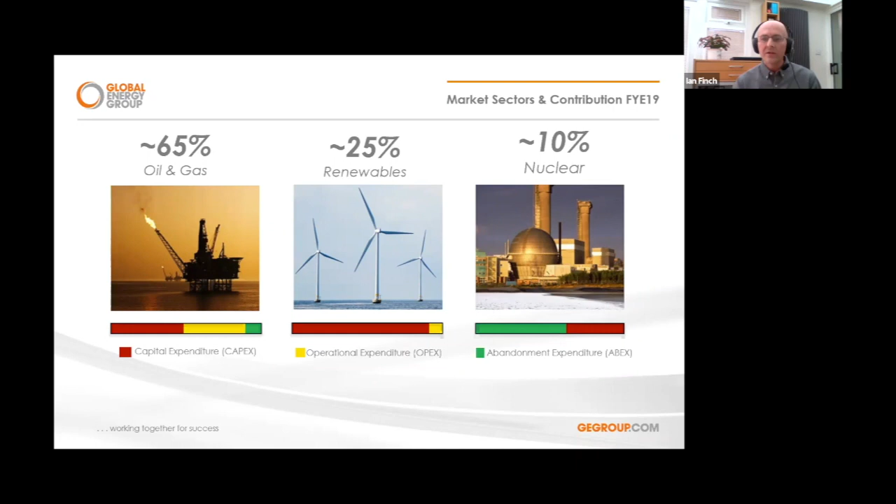Just in terms of some of the sectors that we currently work in oil and gas, we've been very heavily involved for many years doing fabrication of very large structures, but we also still have the capability to do smaller fabrication and maintenance and repair activities. So we've got a rig inspection, repair and maintenance business. Back in 2015, we did our last major project, which was an FPSO refurbishment for the oil and gas sector. And we've also got a marine logistics capability.

This is something that we developed as part of our offering to support the renewable energy business back a few years ago. And I'll talk a little bit more about the investments that we've had on the plant as we go through the presentation.

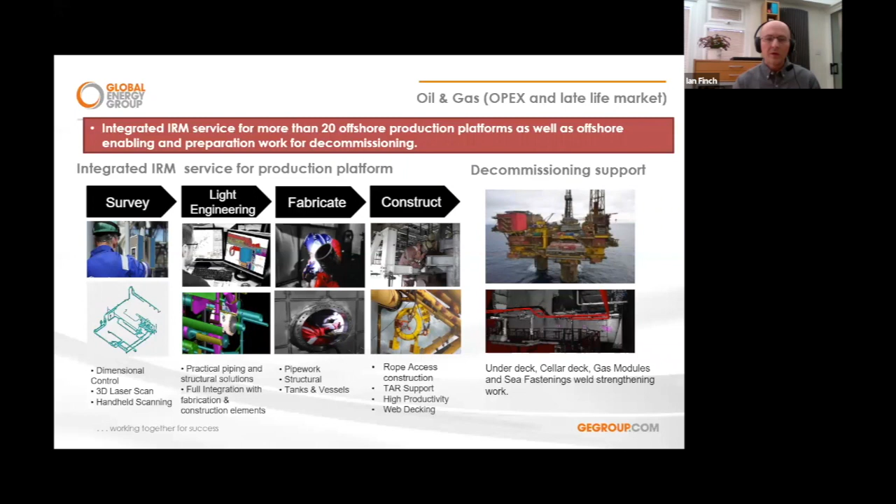So current activities in oil and gas include working on the operational activities of oil and gas projects. We do a lot of survey work, light engineering work, fabrication, construction of various components in the oil and gas industry. We've got rope access specialists and pipe work and structural engineers. So quite a wide varied capability within the group.

Last year, in 2019, Global Energy Group acquired a company called Apollo Offshore Engineering, who are based in Aberdeen. Now, Apollo's been around for a number of years now and has a very well-respected client base in the renewable energy and the oil and gas sector.

And so bringing together the skills and competences of Apollo, which provides the offshore design engineering capability, along with the construction and fabrication capabilities of Global Energy Group, gives the group as a whole the capability now to start looking at full engineer procurement and construction type projects. And if anybody's got any questions on Apollo, I'll happily answer those towards the end of the presentation.

So I just want to take a few minutes to give you a bit of background into how I got into renewables and why I'm so passionate about this sector. So my renewables journey really started when I was working in the industrial automation business for a company called Rockwell Automation. I was 12 years at Rockwell Automation until 2008.

During that time, one of the areas that we had a big focus on was actually energy efficiency. So in industry, we were promoting the use of variable frequency drives to try and drive down the cost of electricity usage in factories and so on.

In 2008, I started a new career in renewable energy working for NAREC, the National Renewable Energy Centre, as it was called at the time. A few years ago, NAREC, as most of you will know, merged with ORE Catapult. NAREC has blade testing and nacelle testing facilities for wind turbines. And that was a fantastic entrance into the renewable energy space.

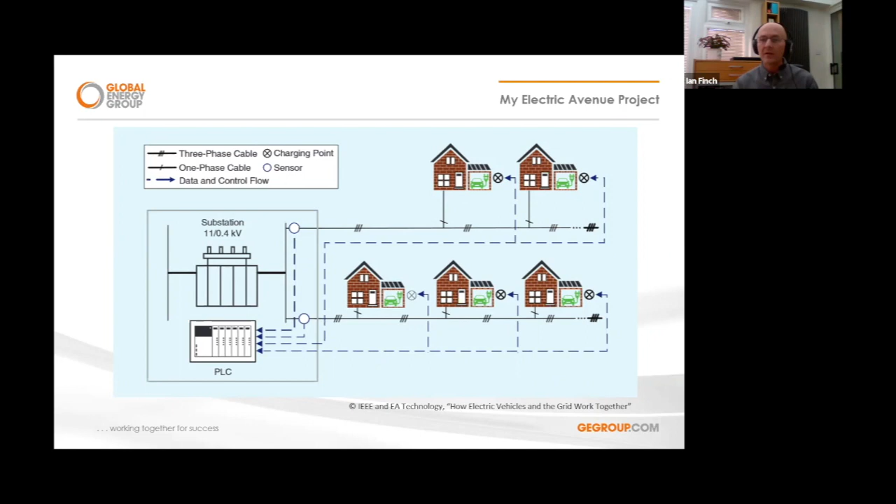Just to give you a little background as to why I believe renewables make sense, both at the commercial level, which we're going to go on to, but also from a domestic level as well, I wanted to show you these figures I took just yesterday.

My solar panels on my roof have actually generated over the course of this year 3 megawatt hours of electricity. Now, if you contrast that with a modern day wind turbine, if you look at something like an MHI Vestas 9.5 megawatt turbine, one single turbine would produce the entire energy production of my solar panels in the space of just 20 minutes today. But nonetheless, it's still a fantastic contribution to the grid.

And for me personally, if you look at just the performance figures for March, 285 kilowatt hours of energy generated in March. Our electric vehicle used 160.5 kilowatt hours of electricity during that whole period. So you could almost say that the electric vehicle has been charged entirely for free using sunlight.

And of course, electric vehicles are something that I'm quite passionate about. They're incredibly cost energy efficient. The cost per mile is approximately 3.5 pence per mile.

And if you compare that with a diesel vehicle, if you took an average diesel vehicle with 45 miles per gallon, and the current diesel price of £1.33 a litre, you'd be looking at about 14.7 pence per mile. So an electric vehicle is actually about 4 times more efficient.

And this, of course, is one of the reasons why the energy industry is seeing this energy transition. People are moving away from fossil fuel transport, and they're moving into a much more energy efficient world.

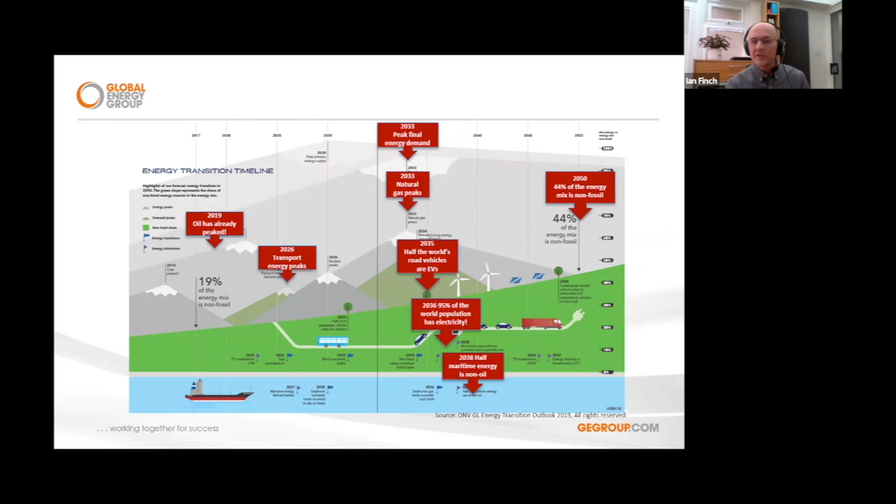By 2038, half of the maritime energy is going to become non-oil. And by 2050, 44% of the total energy demand will be non-fossil.

If you look at the compound annual growth rate for onshore and offshore wind over the last 20 years or so, the average is about 21%, and during the last 10 years it's been averaging about 12% compound annual growth. Moving to more specific figures, 651 gigawatts globally, of which 29 gigawatts is currently offshore wind.

But the offshore wind market is growing even more rapidly. During the last 5 years, the offshore share of new wind installations globally has grown from 5% to 10%. And in fact, by 2024, that share should have risen to 20% of global wind installations.

So certainly offshore wind is going to be here to stay, and we're going to be moving away from fixed bottom technology to floating technology as well. I'll talk a little bit about some of that technology in a moment.

We've got, in the UK, a 40 gigawatt target now of offshore wind by 2030. And the ScotWind leasing round in Scotland alone, which will be of interest to companies operating in and around Aberdeen, is looking at a potential target of 10 gigawatts by 2030. Bearing in mind we've got about 1 gigawatt installed in Scotland today, that's a huge 10-fold increase in potential capacity in a very short period of time. So it's exciting times for the sector.

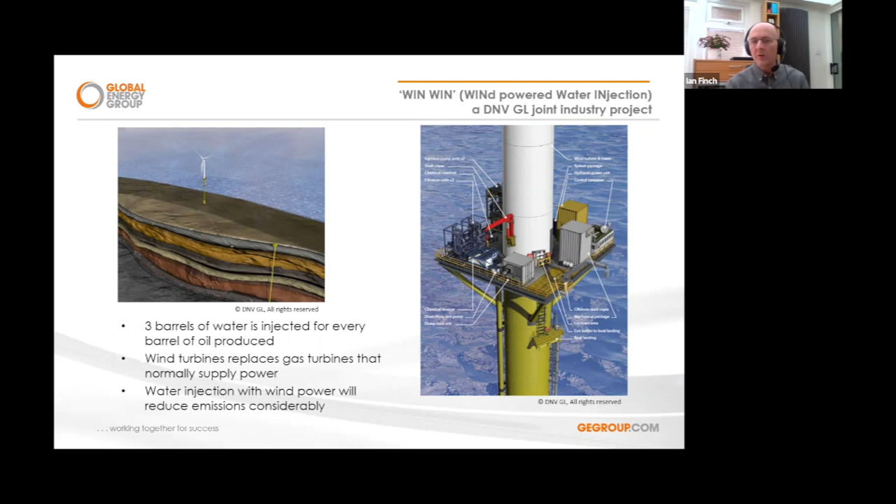Another area is obviously offshore wind to hydrogen. With floating wind turbines or even fixed bottom wind turbines in the right locations, you could have an offshore green energy production facility, essentially making pure hydrogen and oxygen from desalinated seawater. And that produces an extremely efficient method of getting the hydrogen.

One of the problems with electricity is that you can't predict when the wind is going to blow, although it does blow typically offshore most of the time, and most offshore wind turbines now are getting capacity factors between 50 and 60%. You can't guarantee that all the time, so hydrogen provides a method of storing that energy in a convenient way.

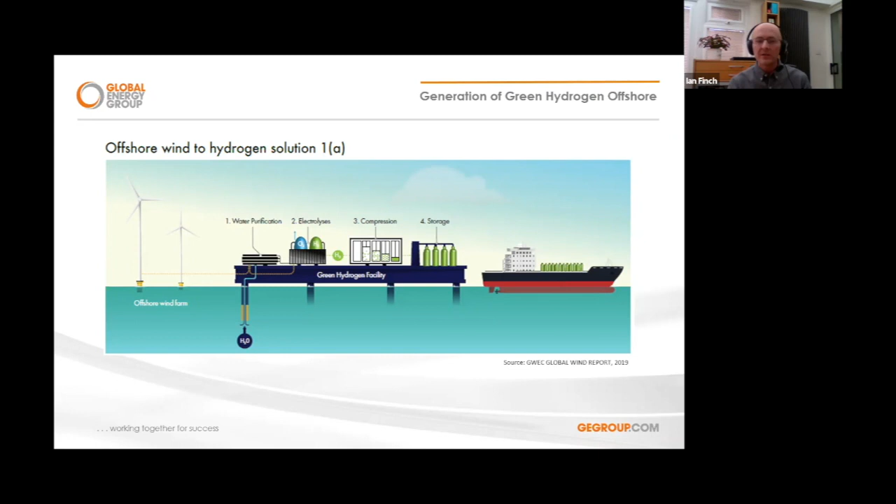These slides are courtesy of the Global Wind Energy Council. This first scenario looks at a water purification plant, an electrolyzer, compression of that hydrogen and storage, and then a tanker or vessel can take that produced hydrogen away. Of course, vessels can be quite expensive.

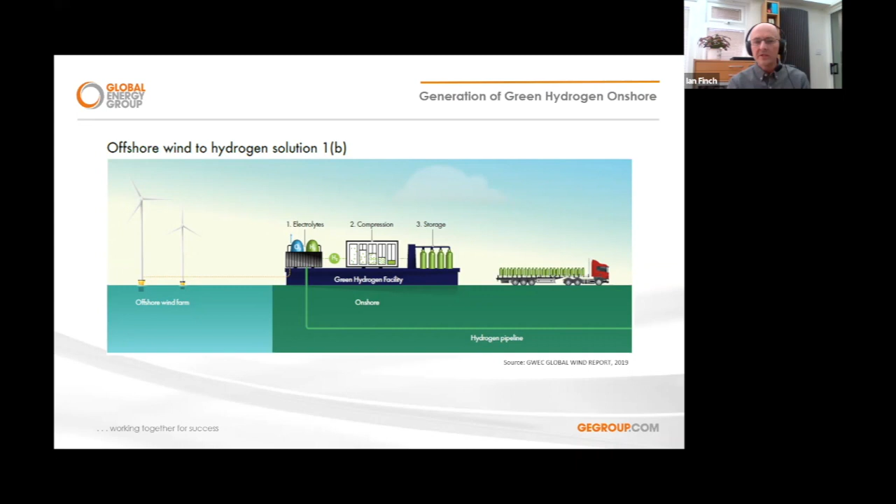So there are also projects looking at doing the electrolyzing onshore, where you can just ship the final product from the electrolyzer into a hydrogen pipeline or via tankers onshore, reducing transmission energy costs. The third option would be to use floating wind turbines with perhaps an existing oil and gas platform, retrofitting those with a water purification and electrolyzer plant, and injecting the hydrogen directly into the existing natural gas network.

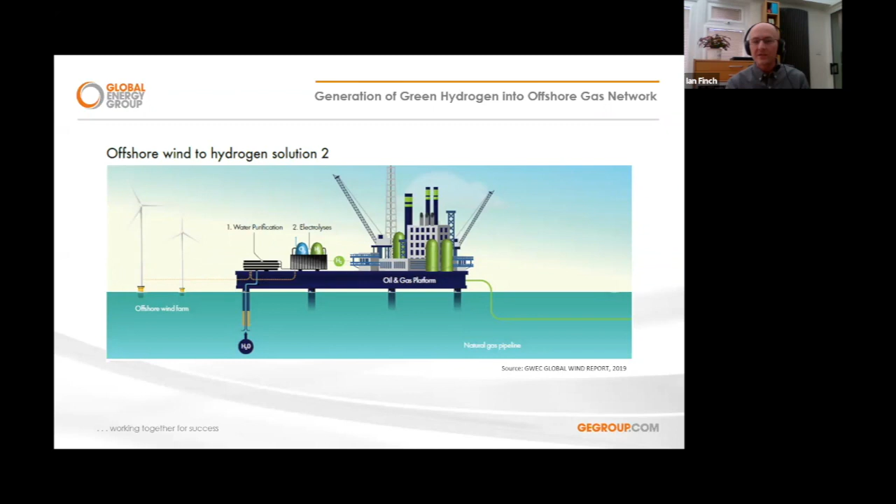It's considered that approximately a 20% mixture of hydrogen should be possible. So there are some exciting opportunities there for the oil and gas sector to engage in the wind industry.

These slides have been very kindly given to me by Aker Solutions. One of the areas where oil and gas companies have readily transferable technology and skills is that for many years we've been developing and designing floating technology, mooring systems, anchor chains, and umbilicals.

All of that information gathered over the years can be readily transferred across to the renewable energy sector. So I do see, over the next 10 years, as renewables grow at this kind of exponential rate, many oil and gas companies will have a huge part to play in helping with the design and fabrication of some of these floating structures and umbilicals.

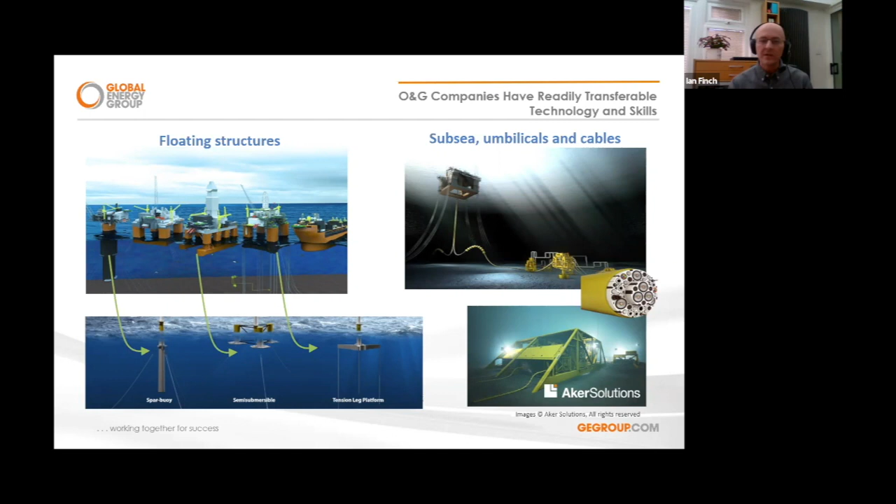I'm now going to move on to our own company's transition into the renewable energy network. Historically, oil and gas was the mainstay of the Nigg Energy Park. Back in 2000, however, we built the last of our major structures. From 1974 to 2000 we did a huge number of projects, but unfortunately that all dried up in 2000.

For about 11 years, the yard was pretty much mothballed, with very little going on.

So Global Energy Group has gone through a stage process of getting into renewables. Where we are today is probably stage 2, where we are now a strategic wind farm construction, manufacturing and marshalling port. Stage 3 is where we're actually going to start manufacturing the towers and the suction anchors, large diameter steel tubes which can be used for floating foundations, for both the oil and gas and the nuclear sector as well.

Stage 5 is where we move into some of the scenarios I've just pointed out, which is the electrification of wind and the design and fabrication of some of these oil and gas platforms to incorporate hydrogen production facilities. This is a future area where Global Energy Group would be delighted to talk to companies that might be on the call today. If you've got projects in mind, we'd certainly be keen to have those discussions.

This is how our yard looked in 2011. As you can see, it was pretty much dilapidated and hadn't had any investment for a number of years.

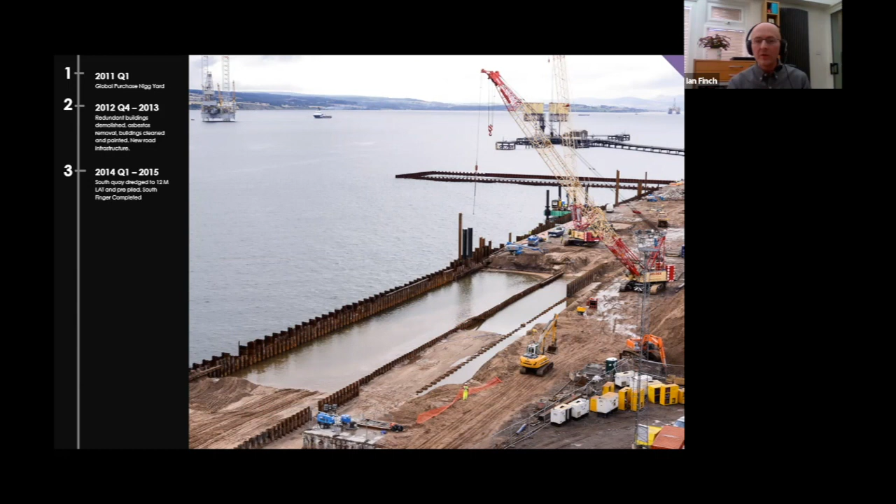So we've got 50 tons per square meter of hard standing capability right up to the quayside edge. We also extended the facility with an additional finger quay, which you can see in the top right corner of the picture, and we've invested about £40 million in additional plant and equipment.

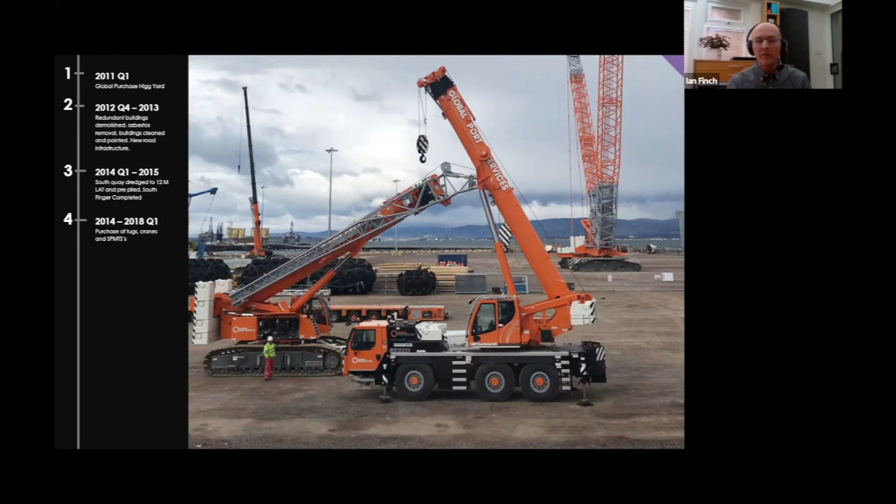So we've got a very large crane, SPMTs and other mobile cranes that we can use around the site. The site is more or less capable of doing all of the operations required for a wind farm project without having to bring in external equipment. This is the view here just in 2018 when we were installing the Beatrice project.

One of the issues we have, as you can see, is that the dock gates are moored outside the front of the quay on two dolphins, which was a problem for navigation for some vessels. So we're going to relocate those dolphins to the other end of the jetty. We've also recently acquired the land to the east side of the quay, locations 6 and 7, which will give us access to additional laydown areas and allow us to run consecutive projects.

In addition, the land at the top of the facility, moving to the next slide, you can see the former Beatrice oil terminal. The lease on that comes up for renewal, I think in 2025. Once that expires and it's no longer used as an oil storage facility, that land will also become available to us to support the renewables projects.

We've been involved in renewables for quite a long time. We started with the Scroby Sands project back in 2004, and did a number of offshore wind projects prior to the Beatrice one in 2018, 2019. We're also involved in many offshore wave and tidal projects. Wave and tidal could also support the oil and gas sector, particularly waves, because in the North Sea we have very strong wave conditions. There are projects looking at using wave energy converters to support these types of platforms.

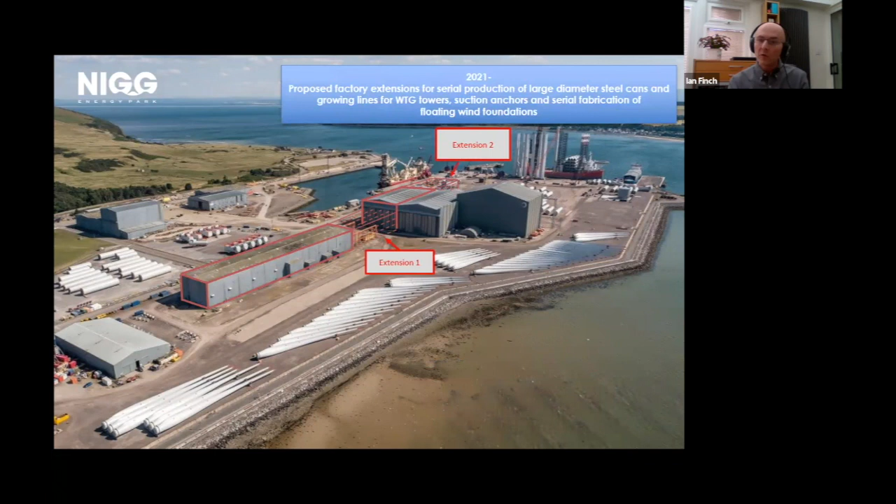In summary, we've already spent over £50 million on the facilities and £40 million in new plant and equipment. The next stage of our development is an extension to the facility to produce rolling facilities, wind turbine towers, wind turbine suction anchors for floating wind turbines, and the tubular sections used for floating wind turbine floaters. That's the outline showing the proposed new factory.

Many of you will have seen in the news that we've just started the new campaign with the Moray East Offshore Wind Farm project, which will run through till 2021. This is for the staging port for the offshore wind jackets. That's an extremely exciting project for Global Energy Group, and really cements our position as one of the world's leading ports for offshore wind renewables. Hopefully it will lead to much more work in the future.

Finally, I'd like to play a very short video, just 3 minutes long, which gives a quick overview of what we're planning for the next stage of our transition into this new energy sector.

We just busted our 20-minute mark - apologies for that. It's a fascinating presentation, absolutely brilliant. I think this is maybe something we could post online for people. I'll skip through, this is my last slide anyway, so I'll just leave that up there.

If anybody on the call is interested in joining us as part of this energy transition, please contact Stephen Thompson, who's the Business Development Director for Global Energy Group. I'm sure he'd be delighted to talk to you.

Thanks ever so much for your time, sorry for running over a little bit. Not at all, thank you for a brilliant presentation, Ian, that was absolutely fascinating. Now we've got 20 minutes for Q&A. I see a hand raised already, so I'll hand over to you, Tim, to ask a question. Hi Tim. Hey Ian, thanks very much. Tim Walsh, Oceaneering. Thank you for that excellent overview of how you see the sector and your experience in that, and also for sharing your personal journey as well.